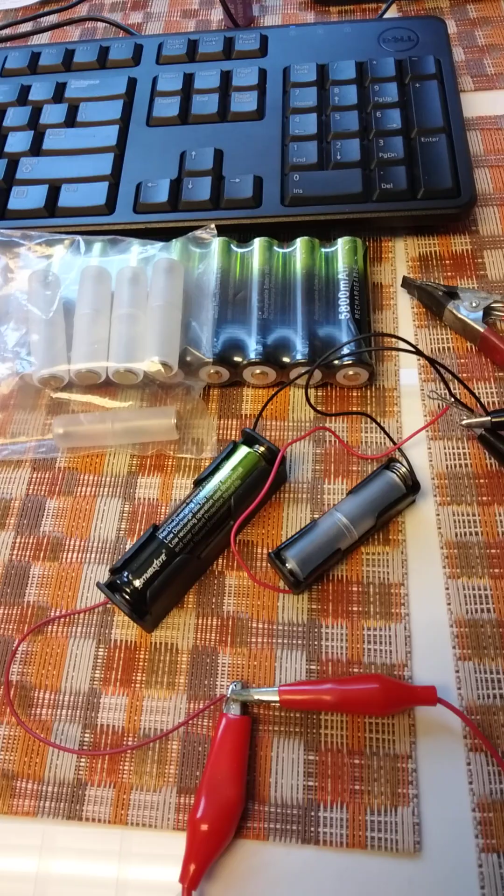As you may know from our prior uploaded videos, we're working on supercapacitor technology, focusing on various deep eutectic solvents with a typical electrolyte like lithium tetrafluoroborate. We're using a very easily prepared DES, choline chloride urea, in a 1:2 molar ratio.

And what we're doing is focusing on studying the graphite samples as prospective electrodes in supercaps. And we are focusing on graphite felt and graphite twine, sometimes called yarn. Let me show you some of it if you're new to this. I'm in my office, I'm not down at school.

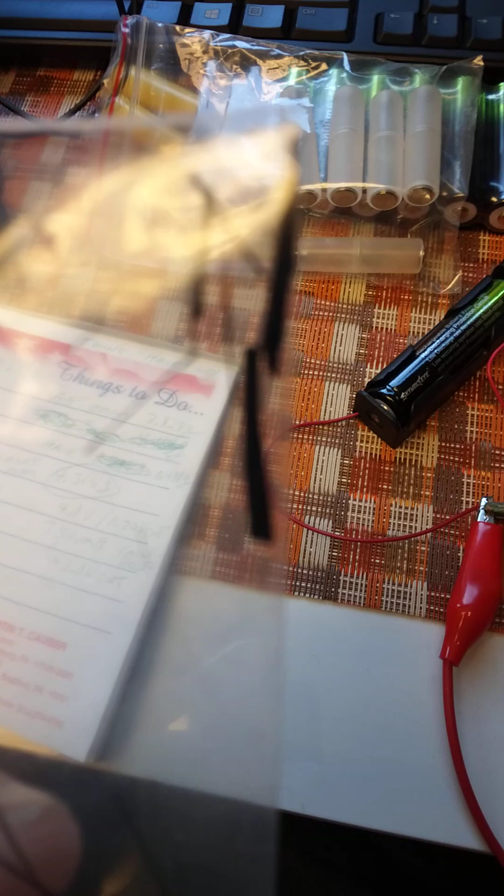But this is the commercially available twine. And it can unravel very easily. I think it has very interesting properties from what I'm seeing. It can unravel very easily into almost like a black hair. Can you see that? Some of it. Thin fibrous material, which has a lot of potential versus felt.

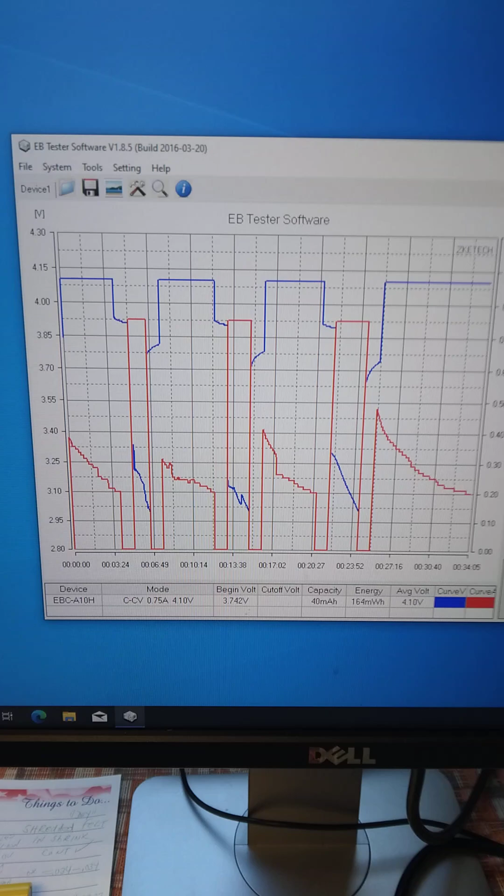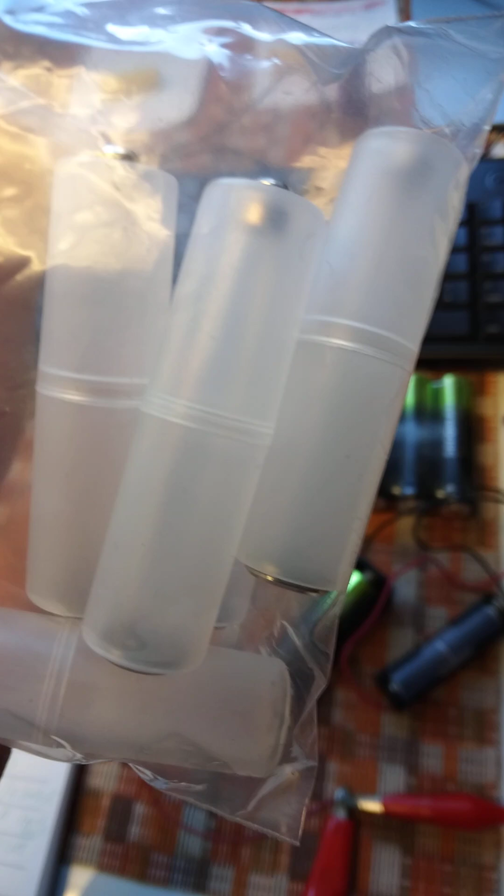And what we do, I'll show you first few cycles here. You can see the discharge is starting to smooth out. That would be in the 4th cycle. We are packing so-called dummy AAs. I like these clear plastic versus the competitive yellow ones.

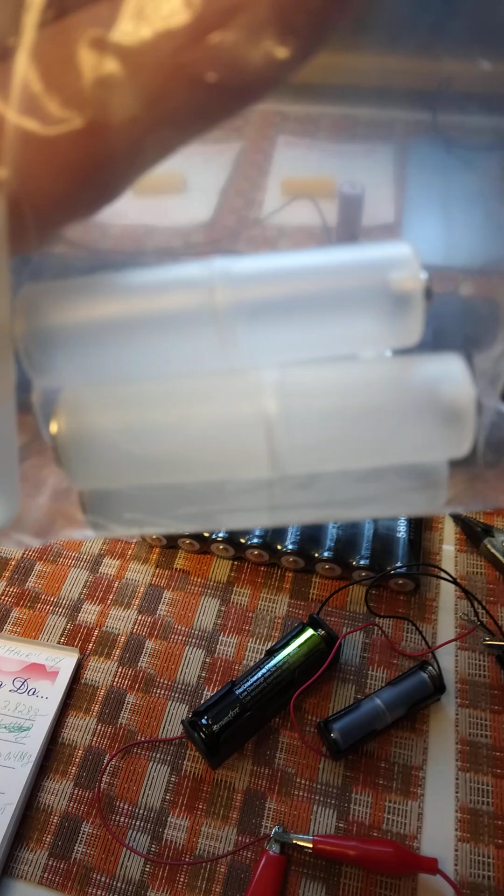The yellow ones have advantages because there's a connecting wire between the electrode contacts inside of this. But I like these clear ones. I find them easier to work with. So here you can see we have packed one in a cradle with the fiber, the yarn, the

twine, in the dummy AA, and we have it in a cradle, and we have it in a circuit with a 3.7 lithium ion secondary cell. And they in turn are hooked up with my electronic load device. Why are we doing this? Well, this is what we call a dry run.

Now, our definition of dry circuit is not the same as that used by an electrical engineer or electronic engineer. We define a dry graphite circuit as one where the graphite is not in contact with any electrolyte. In fact, we didn't even clean it with isopropyl alcohol. We took the commercial sample as is and packed it into the dummy AA. This is a dry run.

Incidentally, there's in there 488 milligrams of the unraveled graphite yarn. So that's about how much we can get in there. There's advantage to this because various DESs and ionic liquids, some of the ones with electronic conductivity values, are not cheap. So justification for using such a DES or ionic liquid in terms of the cost. Now, the choline chloride urea is rather cheap and easily prepared.

Now, why do we have it in there with a 3.7 lithium ion? Well, that's easy. After this dry run of 100 cycles, we will add to the content of the dummy AA some of the DES and electrolyte lithium tetrafluoroborate. Close it back up and then run a wet circuit. In other words, graphite material now soaked in a DES electrolyte solution.

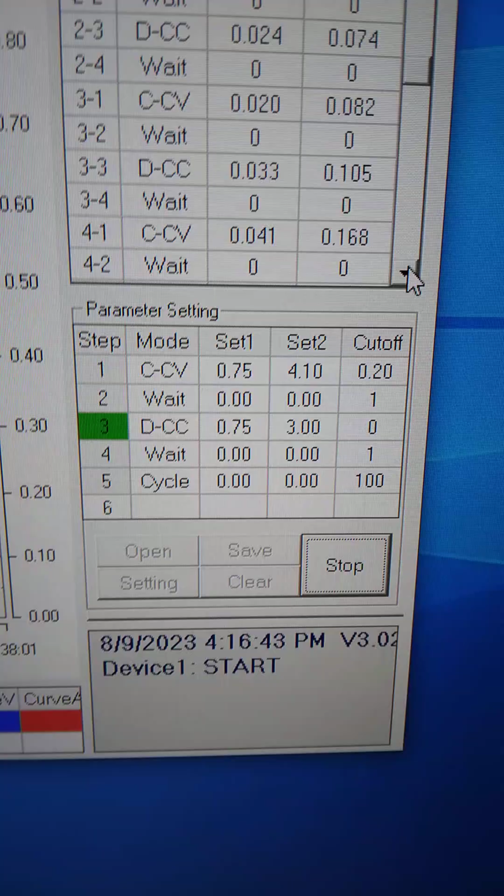Well, what we're doing is we're discharging graphite samples with a lithium ion that I bring up to 4.1 volts. Let's show you my chart. Here you can see the parameter settings, and you can see that we are going to run 100 cycles, and we use a constant voltage to charge the lithium ion up to 4.1 volts.

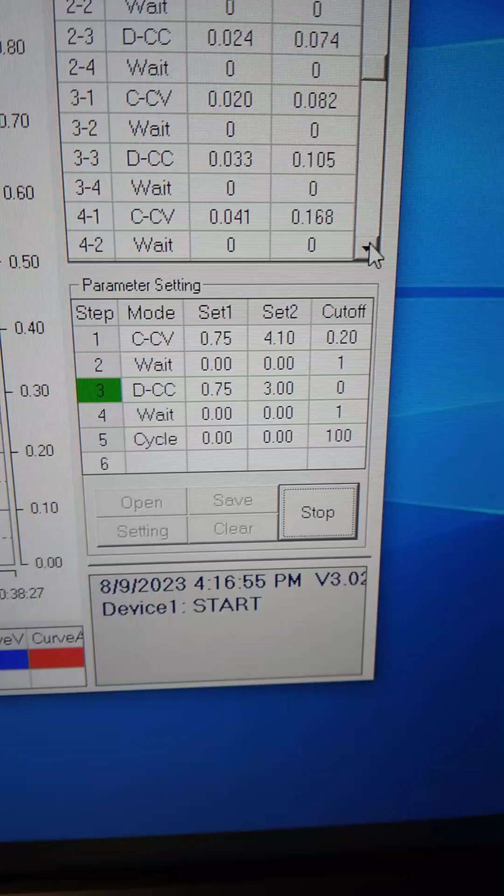And then we top it off with a current down to a cutoff of 0.20 amps. Standard CCV conditions, but we're going up to 4.1 volts. Then we give it a rest period of a minute. Then we discharge, and we're using 750 milliamps for charging and discharging, and a cutoff for the lithium ion, we're using 3.00 volts. A rest period of a minute, and then the cycle continues.

Now you can do up to 999 cycles with the ZKETECH battery electronic load device. We have about 10 or 12 of them at school. They're very competitively priced. I'm getting them, if I recall, about $120 each USD with postage. Make sure you get the EBC model A10H. The 20H will not allow cycle patterns. It will only allow a single test. You want, of course, the cycle test, and you could do 999.

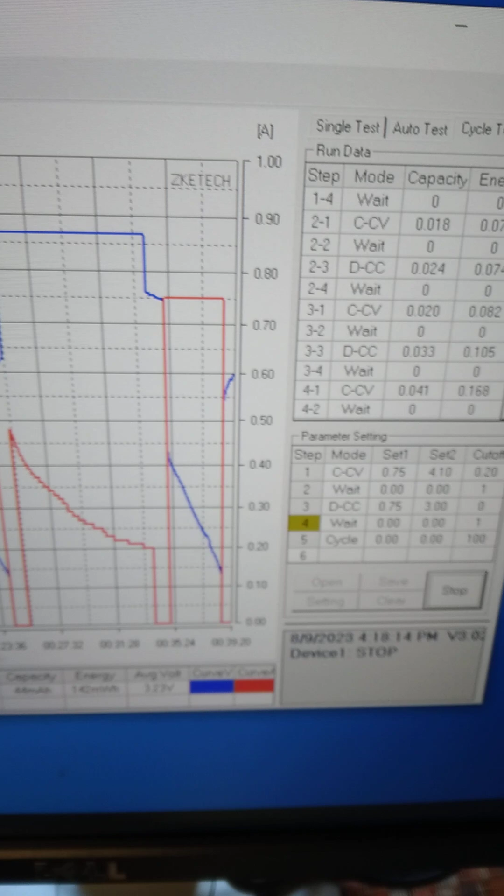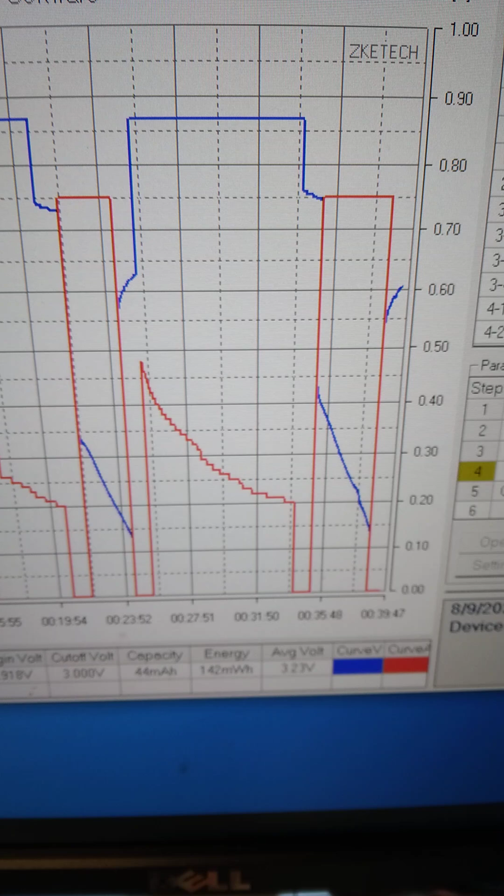Now, of course, in industry, they might run 500,000 to 1 million cycles of charge-discharge with supercaps, but I'm working with undergraduate students, and there may be home researchers, undergrads, and even graduate students and professional researchers that may want to test out small amounts of various ionic liquids or DESs that are very expensive, but small scale run to see how it holds up for maybe 1,000 cycles.

So we're trying to go up and demonstrate that we can run this and bring it up to 4.1 volts versus the 2.7 volts with the e-supercaps, the electrolyte supercaps. Now, if there's water in there, of course, you're going to be about 1.1 volts potential, because you don't want the water undergoing electrolysis to produce hydrogen and oxygen gases. So that's our rationale here. How do the graphite samples with various DES electrolyte solutions hold up?

And we do scanning electron microscopic examination of the graphite samples. Now, earlier today, I had run a graphite felt sample, dry, for 75 cycles, and the Coulombic ratio for capacity between charge and discharge was a beautiful ratio, just about 1.0. So I was able to do 75 runs with a packed graphite felt sample. And now, of course, we're doing the unraveled twine sample.

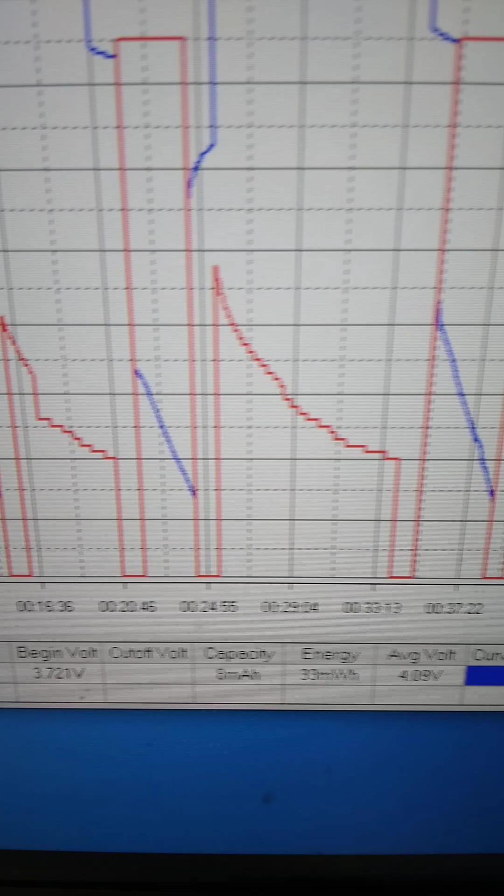Now, look carefully at this for the first few cycles up on my monitor. So over on the left was when we first started. And the lithium-ion battery, the cell I'm using, is the same one as yesterday. But look how the graph starts to smooth out for discharge. Look how rough it is in the beginning. Well, obviously we can attribute this to adjustments of the surface of that graphite twine. Surface area changes, perhaps? Now, when I run the lithium-ion cell itself, we don't see any such display.

Now, don't forget to check continuity of the AA with a multimeter. You want to make sure the graphite is contacting the electrodes in there, the contacts. So check your continuity and make certain the graphite is in contact. It's very easy to forget that, and then you wonder why you get the results you do. But I find this very interesting.

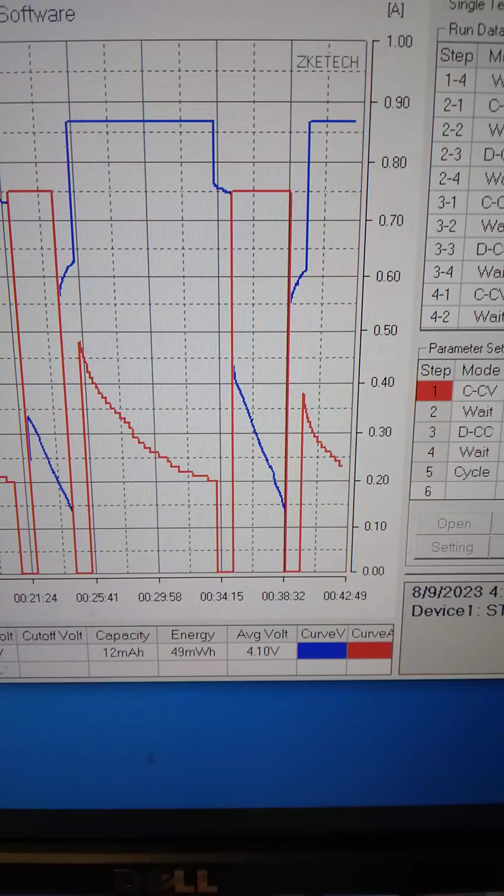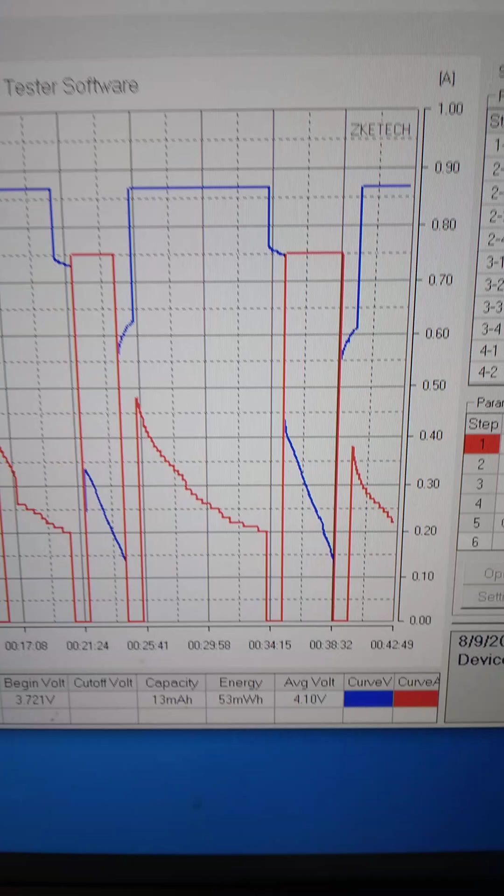And I like to share my research via YouTube because I'll be retiring from teaching in June after 40 years, but I'll be staying with my university doing research. But I like to see people involved, and this is a very good project to introduce people to energy storage.

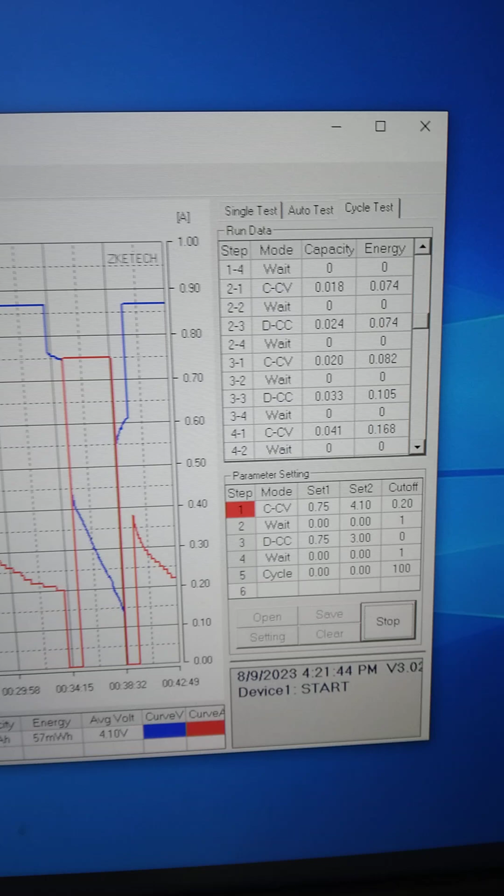Let me just check something here. Oh yeah. Yep, look at cycle 4-1, CCV, 0.041 capacity. And then 4-3, the discharge at constant current, 750 milliamps, 0.044. It's smoothing out.